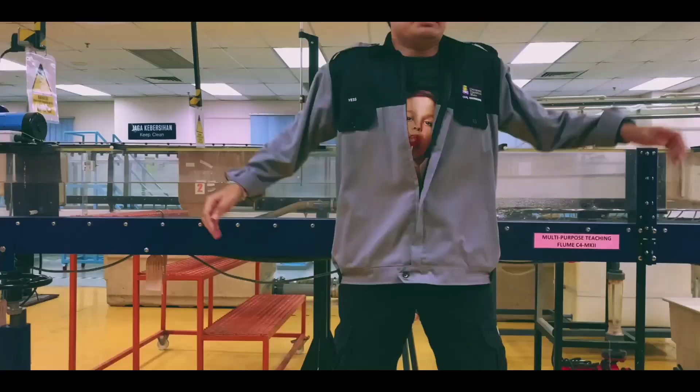Hi and Assalamualaikum. My name is Muhammad AIDIL bin Mat. My student ID is 2022910207. Today, I am going to present about the introduction of hydraulic jump.

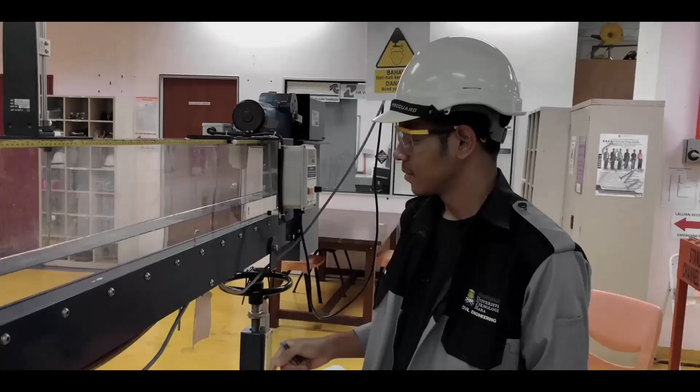So, what is hydraulic jump? Hydraulic jump basically is a phenomenon in hydraulics that is generally reported in open channel flow, such as rivers and spillways. When a high velocity liquid is discharged into a zone of lower velocity, the liquid surface rises abruptly. The strength of the jump depends on the Froude number of the flow entering the jump.

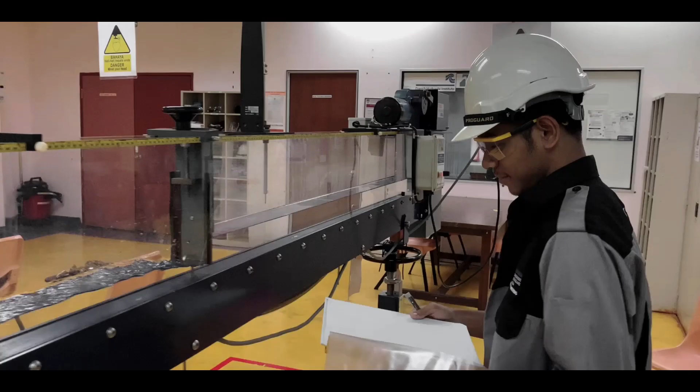Froude number represents the influence of non-uniform flow velocity on open channel, where supercritical flow is obtained at Froude number greater than 1, and subcritical flow is shown at Froude number less than 1. The experiment is usually conducted in an open channel such as a flume, where water flows over a fixed bed. The flow rate is typically controlled by adjusting inflow rate or by using a weir or a sluice gate.

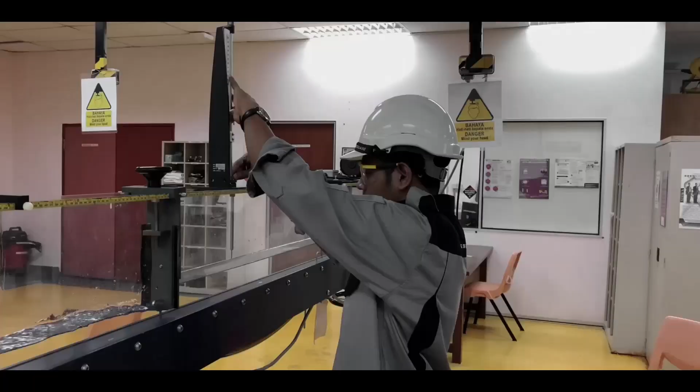The water depth, turbulence and other flow properties are then measured at various points along the channel, including the jump point. The data collected during the experiment is then analyzed to understand the physics of hydraulic jump and its effect on downstream erosion and sedimentation.

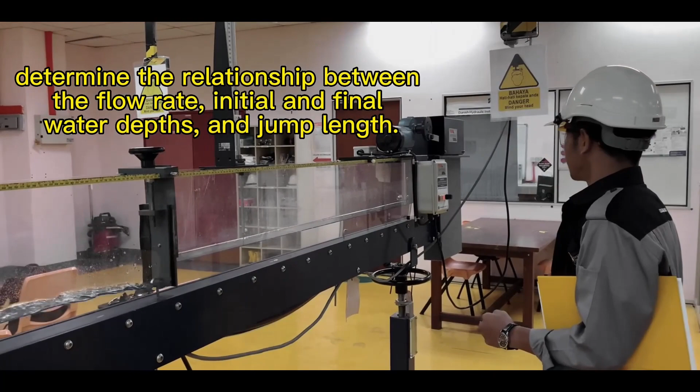The objective of the hydraulic jump experiment is, the first one, to determine the relationship between the flow rate, initial and final water depth, and jump length. The second one is to visualize the phenomena of hydraulic jump in a rectangular flume.

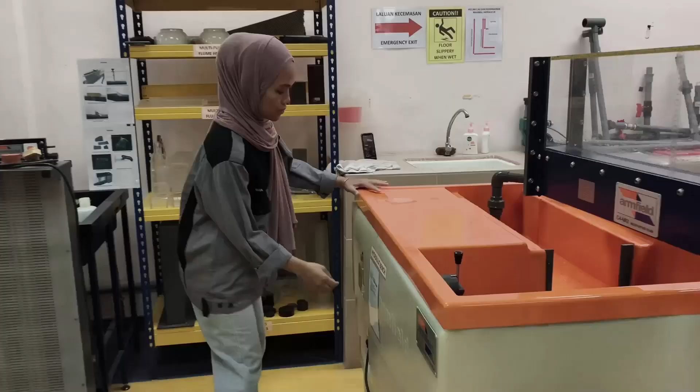Hi, my name is FARAHANA BINTI ABDUL and my student number is 2022916961. So here we're going to show you the procedure of hydraulic jump. First of all, we need to switch on the main plug of the tank. Second, we go to the tank and switch on the tank and turn the valve on until there is a flow through the flume. Third, we have to measure trough width, and measure Y1,

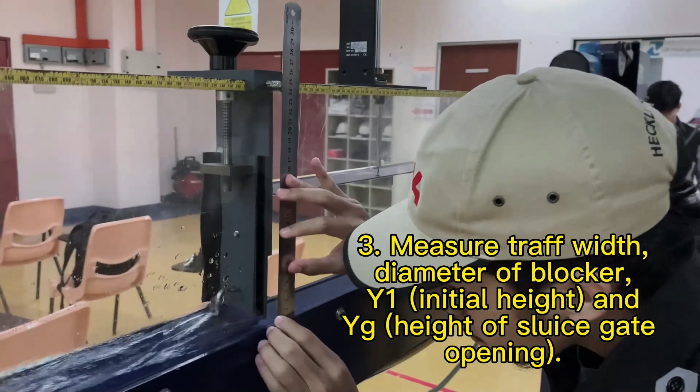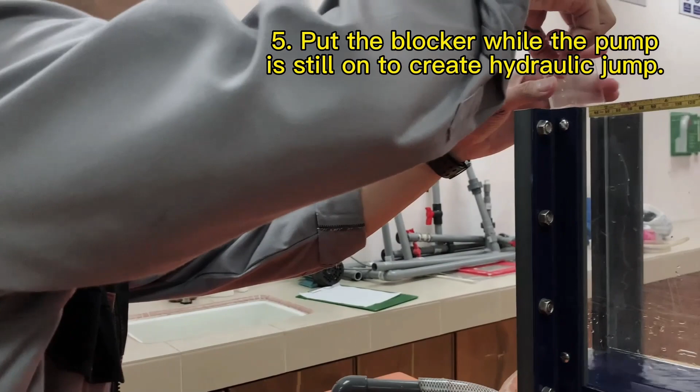diameter of blocker and YG. But for our project, we decided to use 0.4 cm for YG. Fifth, create a hydraulic jump in the trough by turning the pump on while putting the stopper in the hole to prevent the flow out of the tank, and adjusting the flow control valve until the volume reaches 5 liters and the time is recorded.

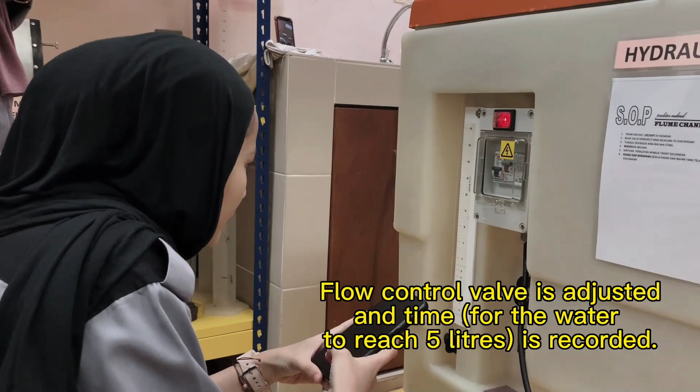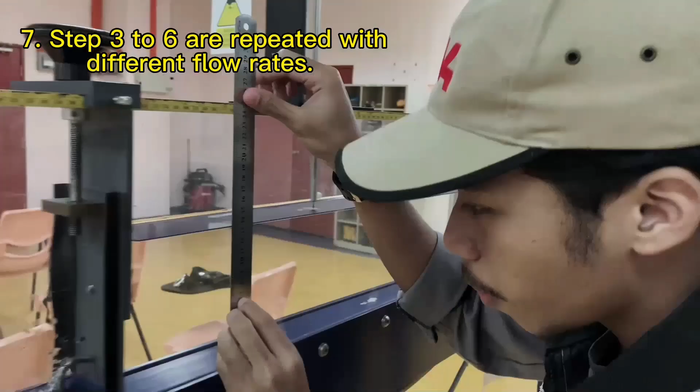Six, after 5 liters of volume have been reached, measure Y2 and calculate V1 based on the flow and the cross-sectional area. Then remove the stopper so that the reading of the volume goes back to 0 liters. Seven, repeat steps 3 to 6 at a different flow rate by readjusting the flow control valve. Repeat the procedure until the data for a total of 3 flow rates have been recorded.

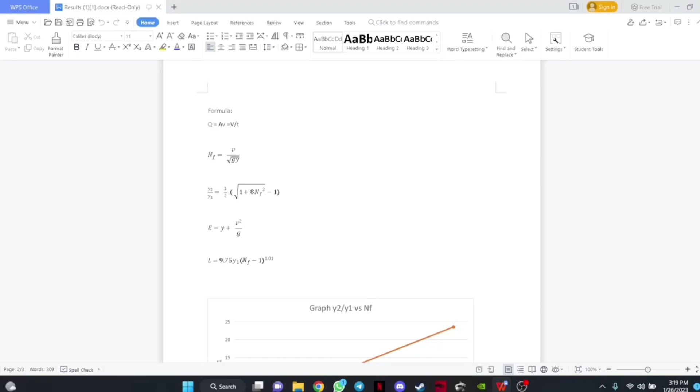Now I would like to explain about the results that we obtained in the hydraulic jump laboratory. Okay, first we need to calculate the Froude number. So how to calculate Froude number? Basically, we need to use this formula right here: F is equal to V over square root of gY, where V is the velocity, g is gravitational acceleration, and Y is the height of the water before the jump.

So after that, we need to calculate the ratio of the height of water after the jump to the height of water before the jump. Number 3, we need to plot the graph of the ratio y2 over y1 versus Froude number. For number 4, we calculate the energy loss by using the formula E is equal to y plus v squared over 2g.

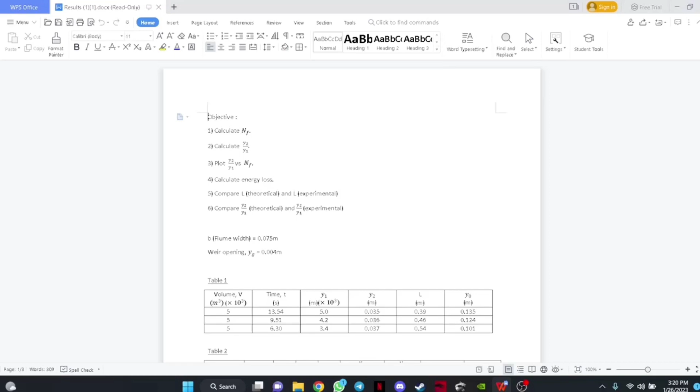Then we need to compare the theoretical length of the hydraulic jump and the experimental length of the hydraulic jump. Last but not least, we need to compare the ratio of y2 over y1 theoretical and y2 over y1 experimental. So as you can see here, this is our table that we used in the hydraulic jump laboratory. So here is the volume. We use a volume of 5 times 10 to the power of -3 meter cube.

Then we take the time for the volume to reach 5 from 0 for 3 times. First is 13.54 seconds, then 9.51, then 6.3. Then after that we measure y1, y2, the length of the hydraulic jump and y0 before the sluice gate. Before we forget, we also need the constant gate opening YG, which is 0.004, and we need to measure the width of the flume, which is 0.075 meter.

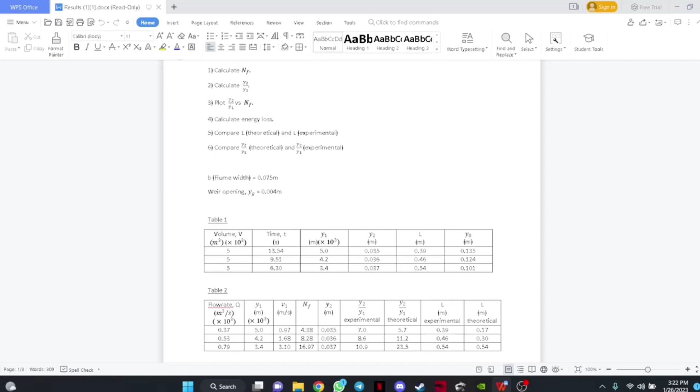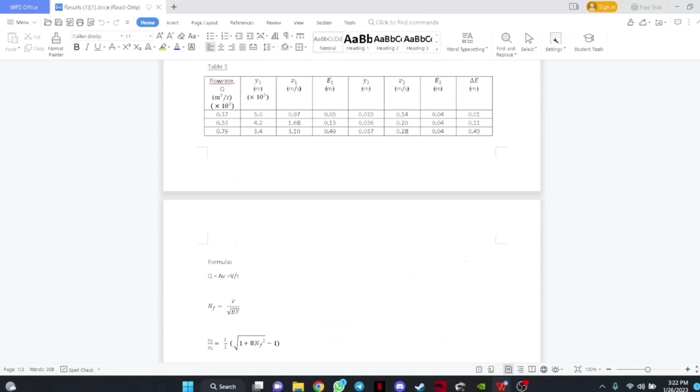Then after that we need to construct a new table. The table consists of flow rate, y1, v1. v1 we find by using this formula, Q is equal to AV. Same goes for the flow rate. We need to find flow rate using V over T.

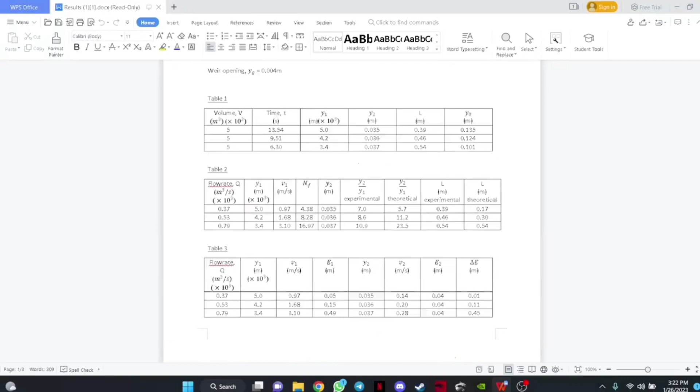Then we need to find the Froude number by using this formula. Froude number is equal to V over the square root of gy. After that, we need to find the ratio y2 over y1 theoretical. For experimental, we just use our experimental y2 and experimental y1 and divide them. We get 7.0, 8.6 and 10.9. For theoretical, we need to use this formula: y2 over y1 is equal to 1/2 times the square root of 1 plus 8 times Froude number squared, minus 1.

Then we need to find the length of the hydraulic jump experimental. Experimental, we simply measure it in the lab. For theoretical, we need to use a formula: L is equal to 9.75 times y1 times Froude number minus 1 to the power of 1.01.

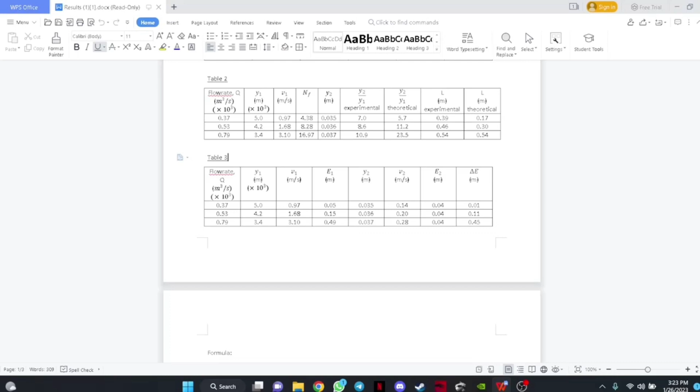Then we need to construct another table, the last table, table 3, that consists of flow rate, y1, v1, energy E1, y2, v2, energy E2, and the total energy loss. E1 is basically the energy before the jump, E2 is energy after the jump, delta E is energy loss. After that we finish our table.

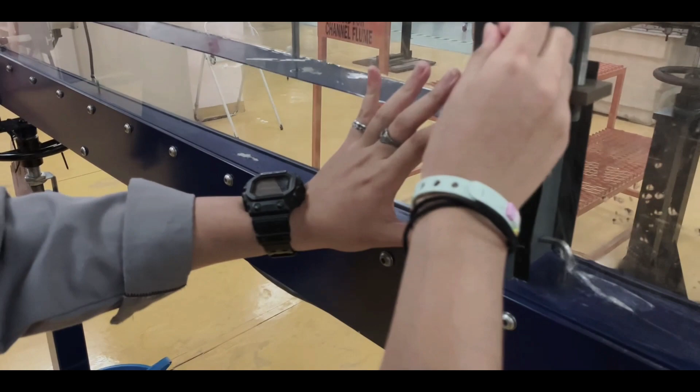The sluice gate was used to manage the volume and maintain it steady during the experiment. At various points along the channel, including the jump point, the water depth, turbulence, and other flow characteristics are measured. To assure understanding of the physics of the hydraulic jump and its impact on downstream erosion and sedimentation, the data have been evaluated throughout the experiment.

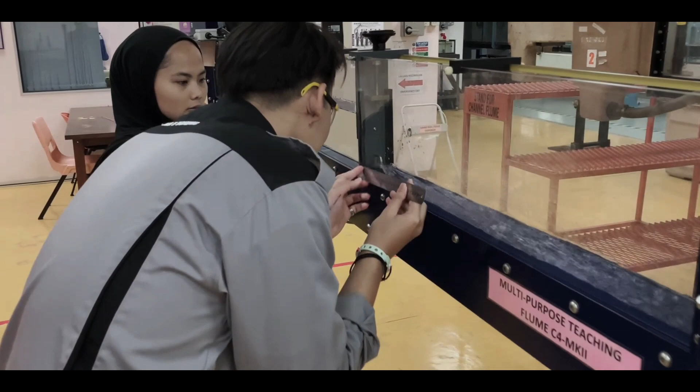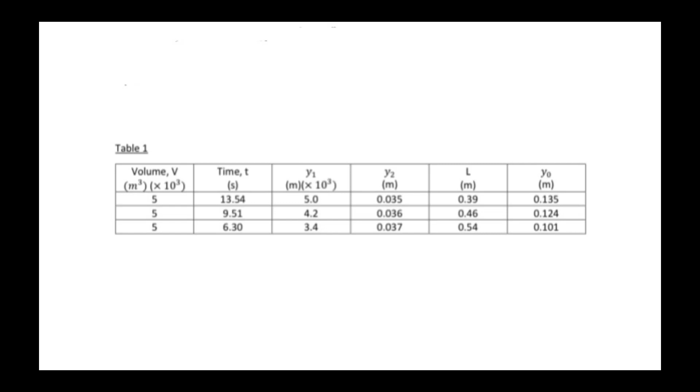The data can be calculated by utilizing a flume with a width of 0.075 meter and a gate opening of 0.004 meter. As shown in Table 1, the time decreases from 13.54 seconds to 9.51 seconds to 6.30 seconds as a result of the lab experiment, which gave us the constant volume of 5 times 10 to the power of -3 meter cube. Y1 has values of 5, 4.2 and 3.4 times 10 to the power of -3, while Y2 has values of 0.035 meter, 0.036 meter and 0.037 meter.

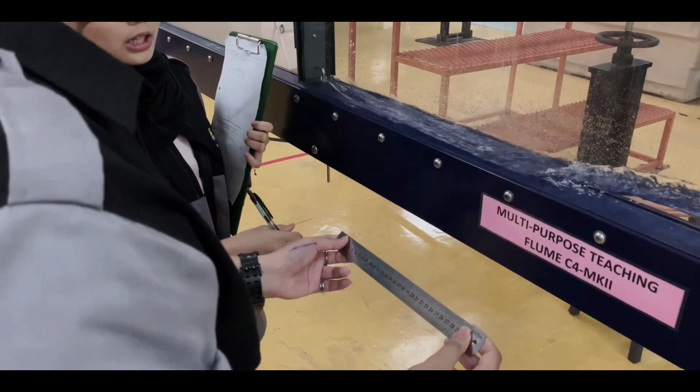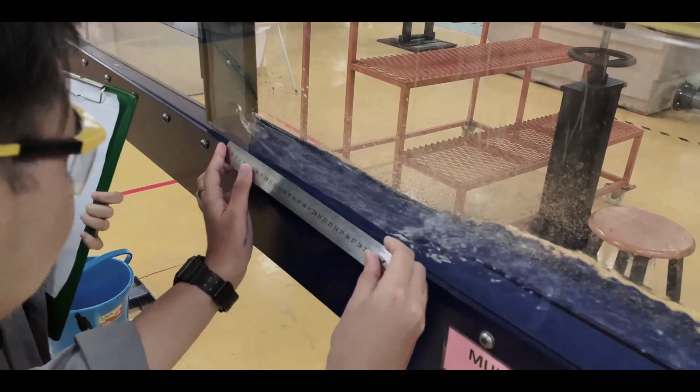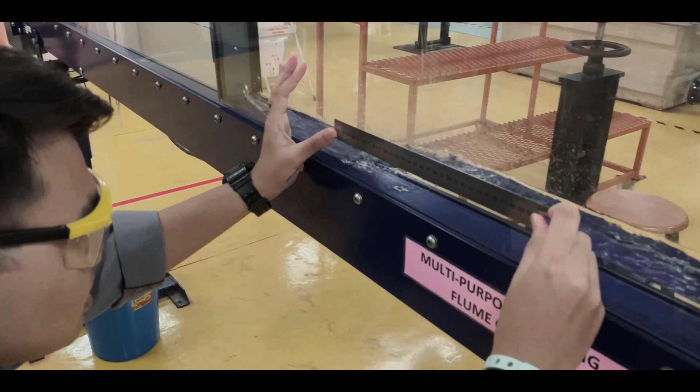We must determine the relationship between the Froude number and the ratio of Y2 divided by Y1 in the following part. The wave-making resistance between bodies of various sizes and shapes is compared using the Froude number. Whether a free surface flow is supercritical or subcritical depends on the Froude number, which might be more or less than unity. By measuring the trough width and taking measurements for YG, Y1 and Y2, we opted to utilize YG as 0.4 cm for the project. The flow rate for the first one is 0.37 meter cube per second, the second is 0.53 meter cube per second, and the last value is 0.79 meter cube per second according to the result in Table 2.

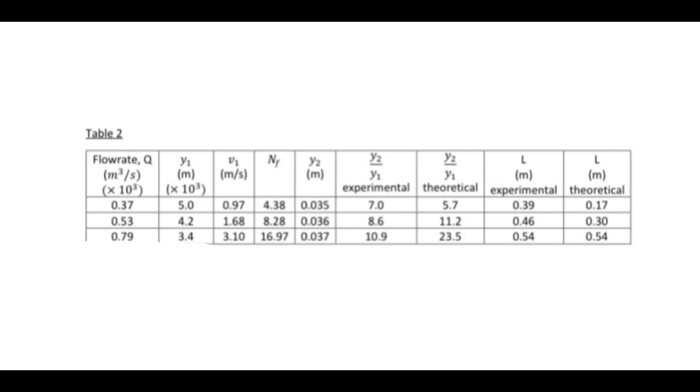The L experimental and theoretical have very little in common. The theoretical value is 0.17 meter, 0.30 meter and 0.54 meter, but the experimental value is 0.39 meter, 0.46 meter and 0.54 meter. The table's Froude numbers are 4.38, 8.28 and 16.97. For the next discussion, I will pass it to my partner.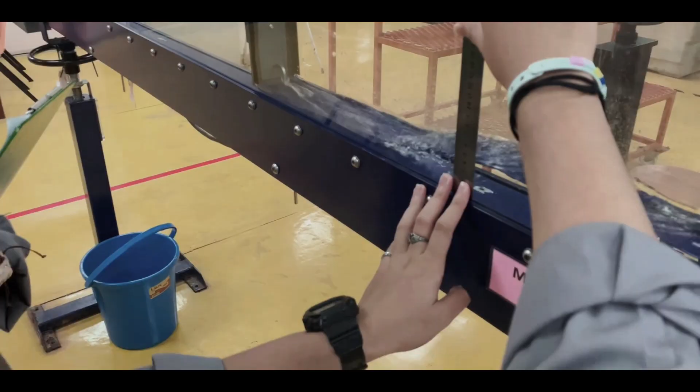Our goal in the last part of this study is to identify energy losses based on the Table 3 data. The second part's values for the flow rate, Y1 and Y2 are the same. We found V1, E1, V2 and E2 using the provided formula. V1 values are 0.97 meter per second, 1.68 meter per second and 3.10 meter per second, whereas V2 values are 0.14 meter per second, 0.20 meter per second and 0.28 meter per second. The values of V differ significantly from one another.

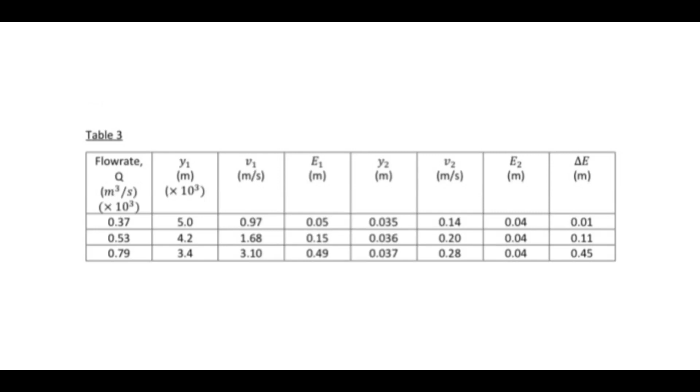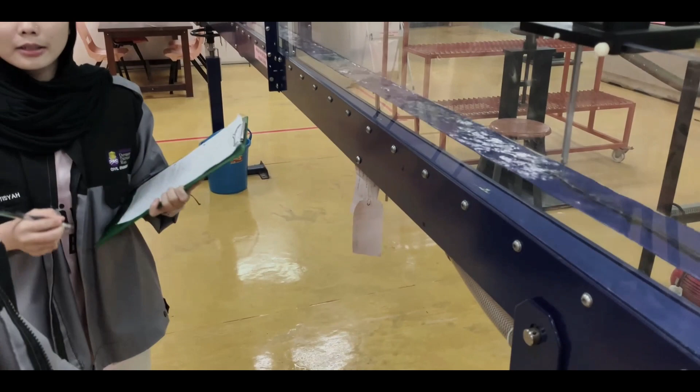To determine the value of E, move on to the following. While the E2 values are all the same at 0.04, the E1 values are 0.05 meter, 0.15 meter and 0.49 meter. After all the values are calculated, the difference in E can also be found, which are 0.01, 0.11 and 0.45. Although the momentum is conserved throughout the hydraulic jump, the energy is not. There is an initial loss of energy when the flow jumps from supercritical to subcritical depth. The resulting loss of energy is equal to the change in specific energy across the jump, given by the equation of delta E above.

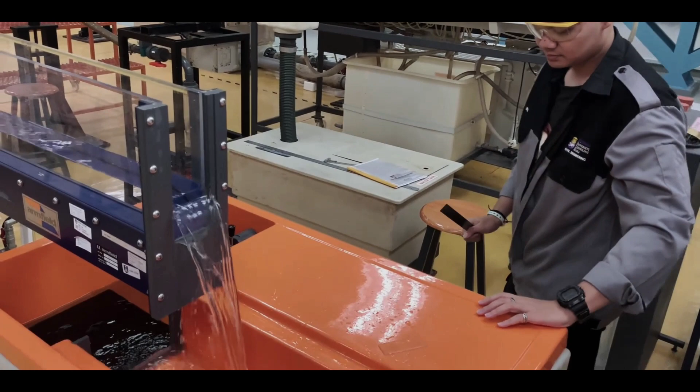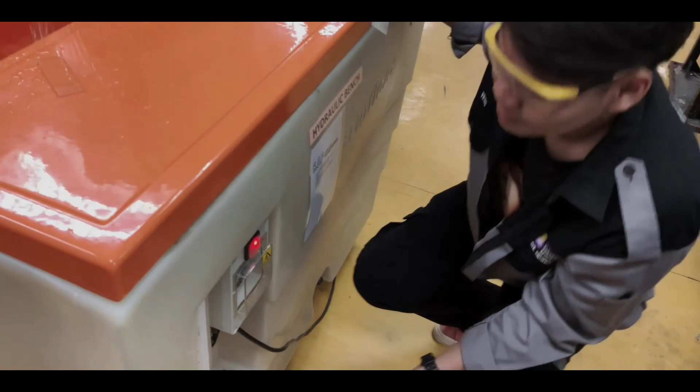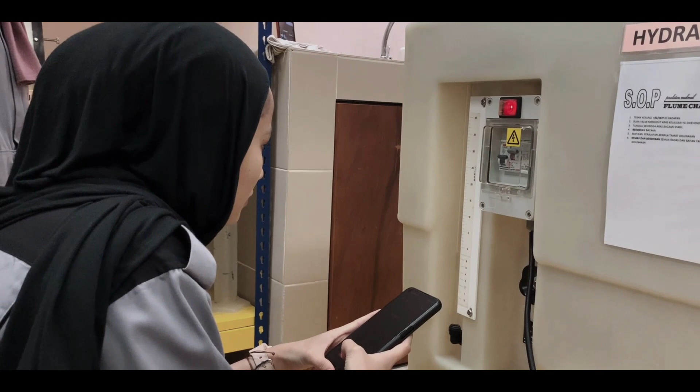Regarding the open channel flume, the impact of shear force may be owed to the friction between the hydraulic jump flow and the wall sides. The hydraulic jump is used to dissipate large quantities of energy, to decelerate the excess kinetic energy of the liquid so it will not damage the structure of the dam and cause failures. Hydraulic jumps are ideal for the mixing of chemicals for water purification and treatment plant purposes. In this experiment, all the electric terminals were tightly connected to avoid partial contact. To avoid parallax error when taking the data readings, we were careful and fully focused when conducting the project.

In conclusion, hydraulic jump experiments are an important tool for understanding the physics of the hydraulic jump phenomenon, which occurs when a liquid such as water flows over a fixed bed. The result of the experiment can teach students about how hydraulic jump occurs, and the knowledge from the experiment can be used to design more efficient and effective hydraulic structures, such as spillways and weirs, and to understand and manage important environmental flows in natural channels and rivers.